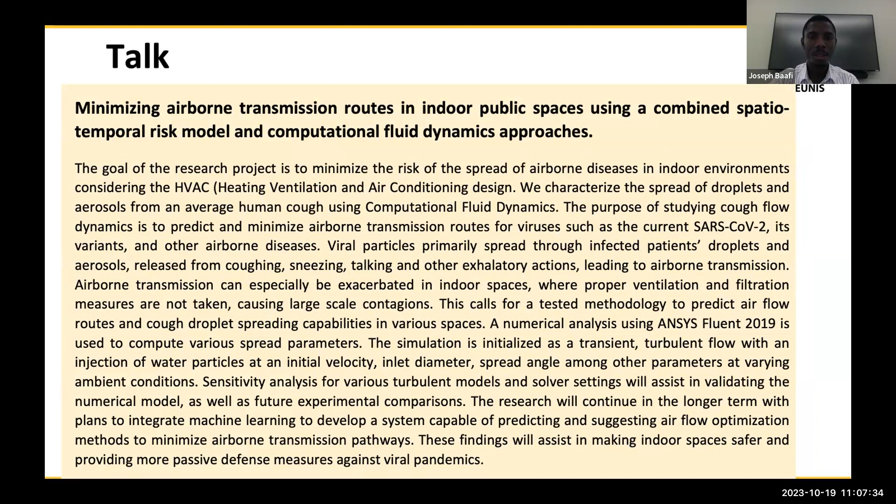And so today we are privileged to have Marina to lead us through this talk: minimizing airborne transmission routes in indoor public spaces using a combined spatio-temporal risk model and computational fluid dynamics approaches. And so we welcome Marina, and thank you all for joining us today.

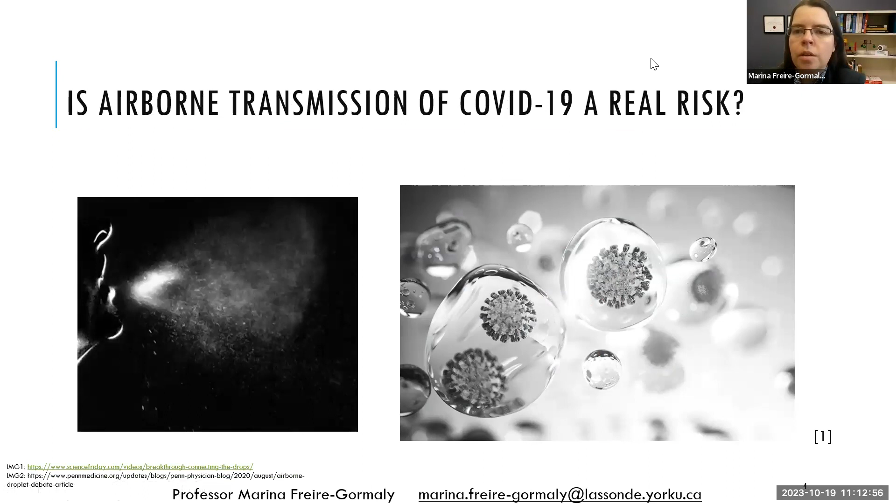So I think everyone's quite familiar in this audience with the research context, but we all lived through the pandemic of COVID-19, and we know that it's airborne transmissible. But at the beginning of the pandemic, it was a bit of a question whether the airborne transmission of COVID-19 was a real risk or not. So many researchers did these types of visualizations of a cough, or if someone sneezes, how many droplets and what are the size and range of sizes of those droplets, and how many viruses can even survive within those droplets and for how long. So there was some mounting evidence that really showed that the airborne transmission of COVID-19 was happening.

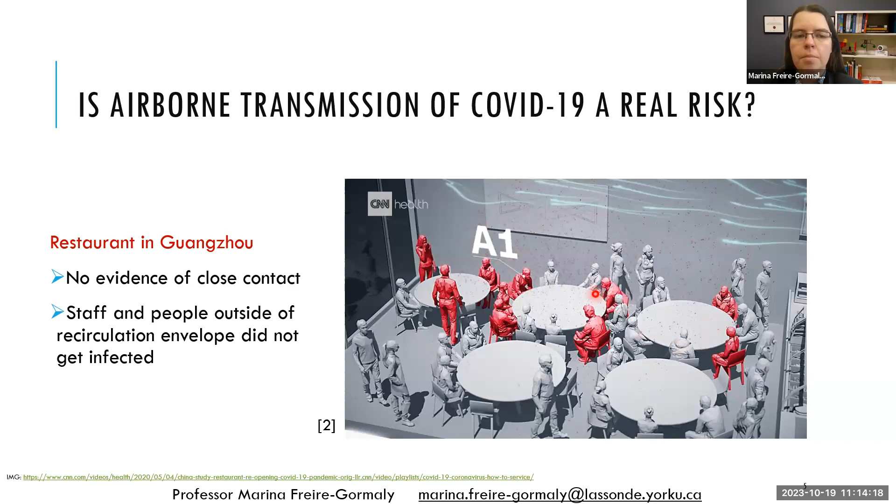So later on, some researchers did a study of the HVAC there. So HVAC is heating, ventilation, and air conditioning. And as you can imagine, it's pretty hot in Guangzhou. In the restaurant, they need to make sure the air is circulating. So they had an air conditioning system here in the top right corner. And it was creating a circulation loop right above these three tables. So that provided the evidence that all of these people in red had gotten infected because of the airborne transmission. And we also know as we speak or as we eat, we create a lot more droplets than when we're just, say, sitting passively in a lecture hall.

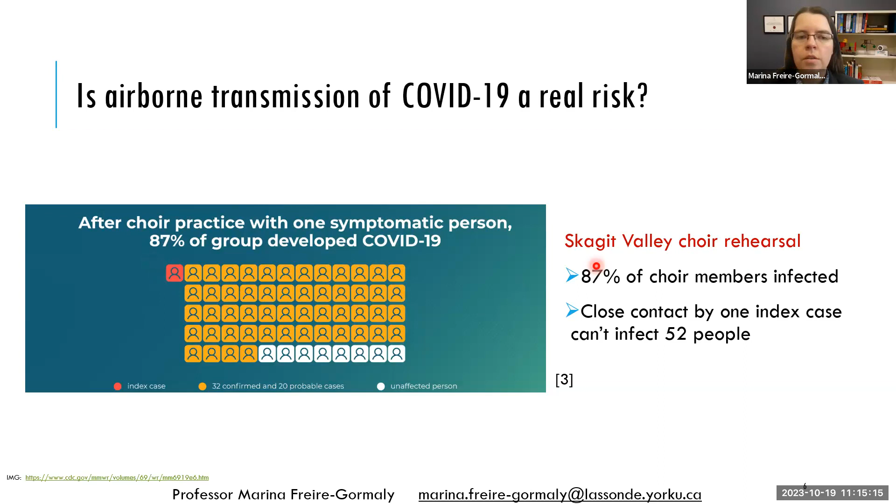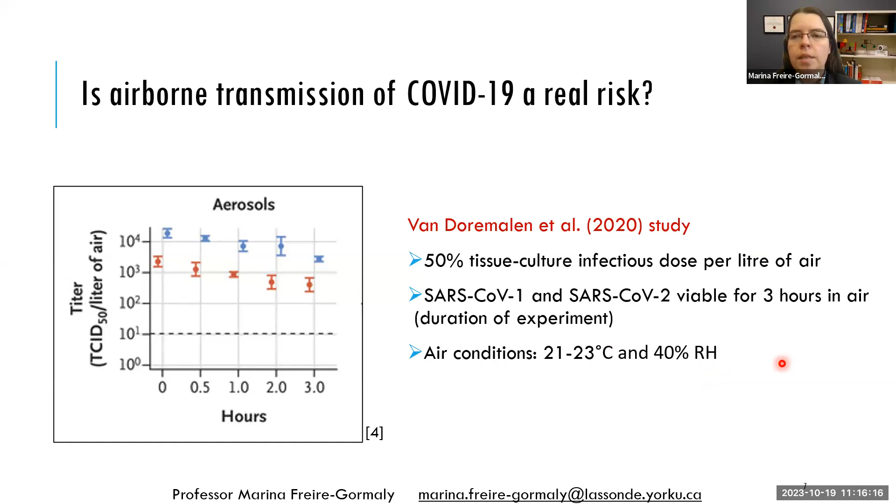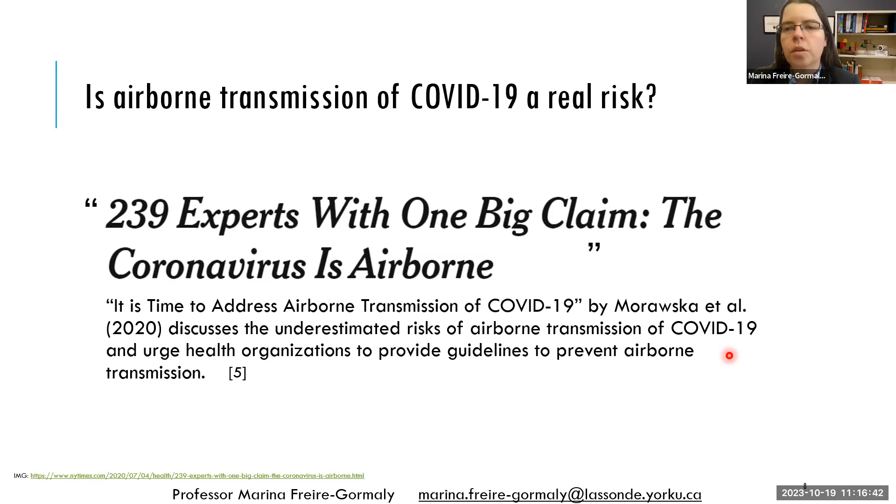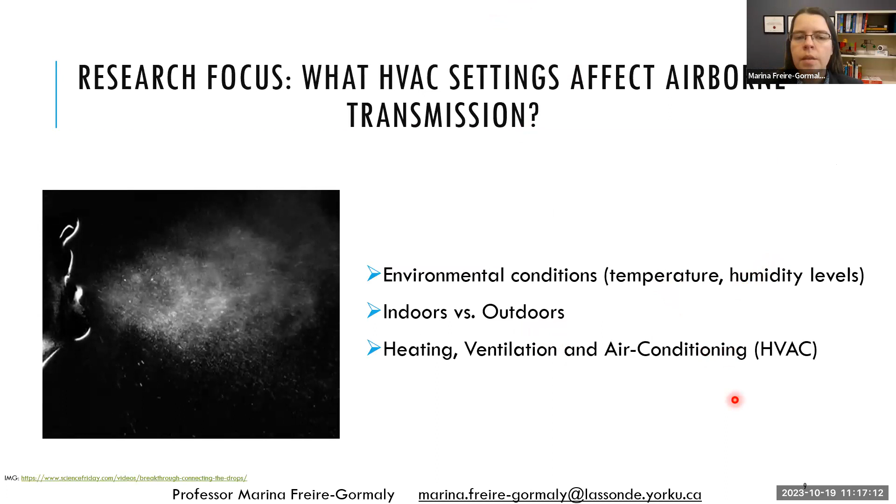So our research really looks at what HVAC settings affect airborne transmission and what are these environmental conditions like temperature, humidity levels, how about indoors versus outdoors, and then how can we design the heating, ventilation, and air conditioning, the HVAC system, in a better way to minimize the risk of transmission. And how can we even make sure that classrooms and offices are safer when they reopen?

So there was a large focus on using disinfectants and wiping surfaces, but fundamentally, people are going to be sitting there for maybe 8 hours per day, whether they're wearing a mask, a fabric mask, an N95 mask, KN95 mask, and whatever the HVAC configuration is. Still, even today, there are many researchers in the US and Canada that are really calling for improved ventilation systems in elementary schools and hospitals and office spaces.

What we've been working on, I'm going to present some of my graduate student Armakan's work, as well as Kishan Webb. He recently graduated from his master's, and Raihan Ali, he's still working on his master's, but he's made some good progress. So I'm going to show all of their recent research. So the goal of this research was to look at the space and HVAC optimization to minimize the risk of airborne transmission. So one area that's very good at this are hospitals.

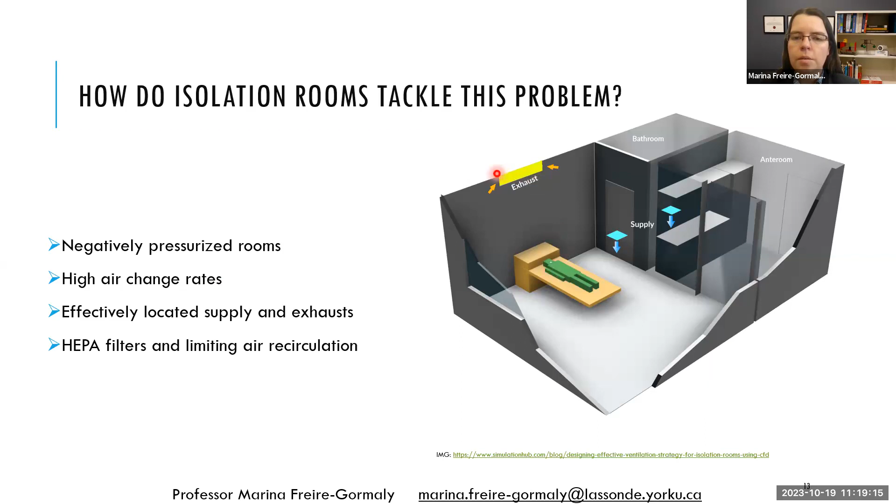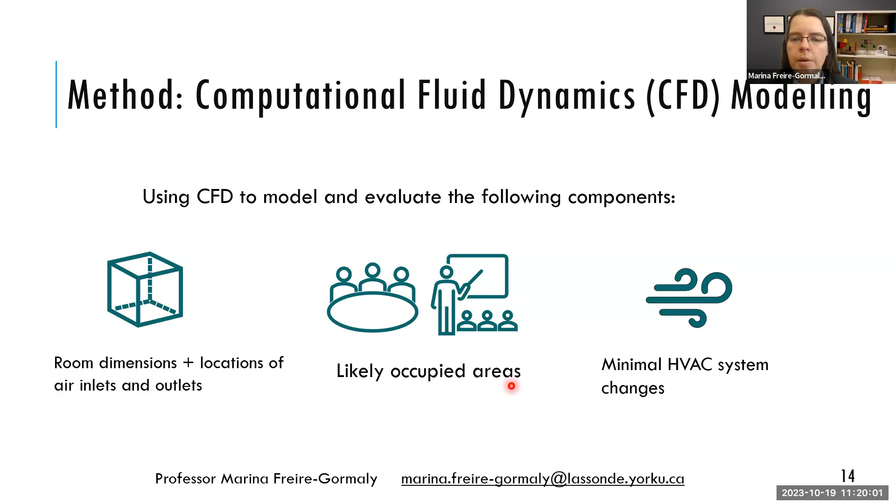So we use a combination of computational fluid dynamics modeling, and then we consider where are the likely occupied areas. And it's very expensive to completely renovate a building, so we look at minimal HVAC system changes, but we also care about how we can make it safer for the future. So it's quite important to think about how do we design buildings more safely for the future, or even aircraft or buses, for example. So we take into consideration the room dimensions, the locations of the air inlets and outlets, and then the likely occupied areas, and what HVAC system changes would need to be done.

So there was an earlier paper by Yin et al., and they looked at this isolation room. So there's a main exhaust. It's a slightly different configuration than the previous slide. And then there's an overhead supply. There's also an auxiliary exhaust and a displacement diffuser. And then this is our simulation work where we try to use their model of all the dimensions of the place and then try to simulate it using computational fluid dynamics.

They actually use an entire experimental chamber with many temperature probes and aerosol measurement devices. So they had a very extensive experimental work. So we wanted to experimentally validate our simulations with the results they had already published. So here you can see when the patient coughs, all of these aerosols are generated, and then we can track how far they've flown over the simulation time.

And this is the auxiliary exhaust. So many of them you can see are traveling towards the exhaust there. But some of them do get deposited on the floor and on this caretaker. So it's just a rectangular prism, but this represents, say, a nurse or a doctor or a care worker, or maybe even a family member that might be visiting. So we wanted to see how those particles get flowing out of the patient.

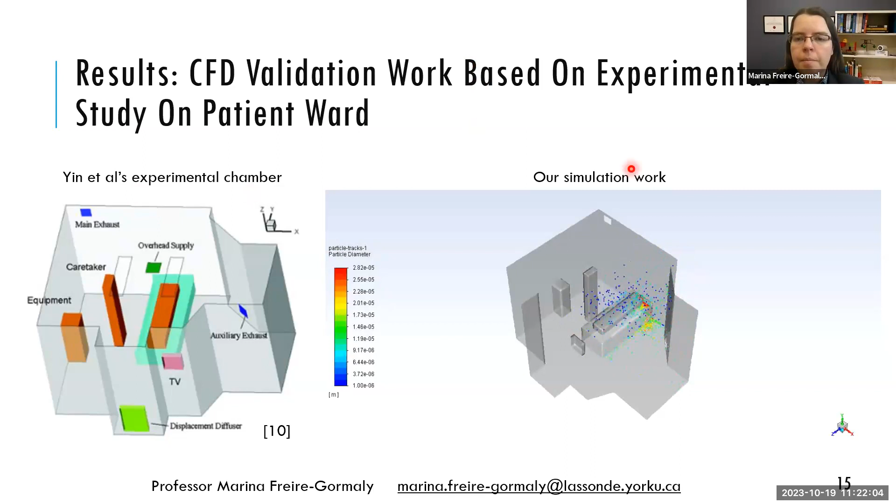So part of this work required setting up this computational domain. So it's time dependent. It also used a turbulent k-epsilon RNG model, and it also uses Eulerian-Lagrangian particle tracking. And the different initial conditions that we can specify were this particle injection from the cough of the patient. And then we also have boundary conditions like these inlets and outlets of the supply and the exhaust and the diffuser location. And then if you were to zoom in on these, you can see there's vectors demonstrating what are the directions of these velocities. Okay.

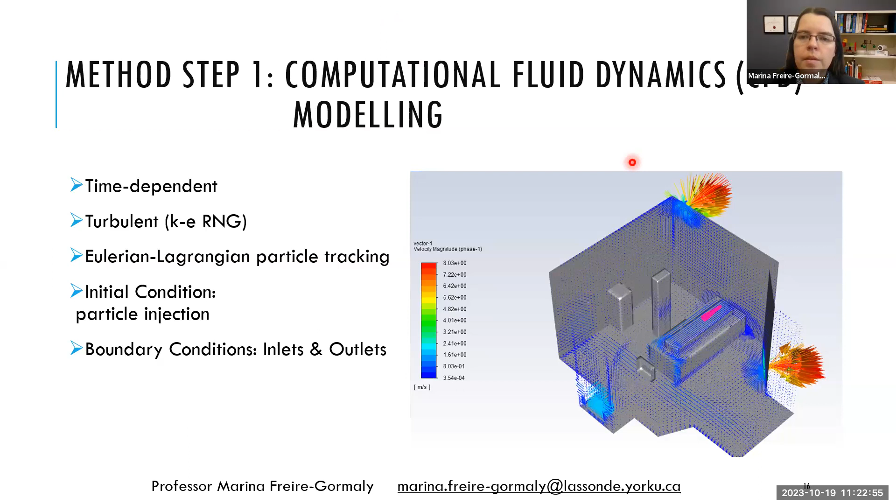So this was done for a classroom by another set of researchers, and it really inspired our work as well. So they have the instructor at the front. So when you're speaking and you're talking to a class of students, a lot of aerosols are generated as you try to project your voice and make sure that even the student at the back of the room can hear you. And so in this classroom, the researchers wanted to quantify what is the risk of transmission to these students that are in the front compared to the back, and what happens if they were to move these HVACs from the front of the room versus the back of the room.

So what they found was when it was at the back of the room, far away from the person that's talking the most, then there was a pretty well-distributed risk. But then if you take a cross-section and a plane directly where the heads of those kids are, then you can see the most risk is closest to the instructor, and there's a bit of a hot area for the front student on the far side near the window.

And also in another cross-section here, you can see that when you put the ventilation at the front, then we've made it much safer at the back, and for most of the students. Now it's only just this one student at the front. So where you put this supply air does have an impact, and earlier researchers were also able to demonstrate this. This is for a relatively small classroom though, and we know at York University, for example, or any university really, you can have upwards of 150, 300, sometimes even 1,000 students in a given classroom.

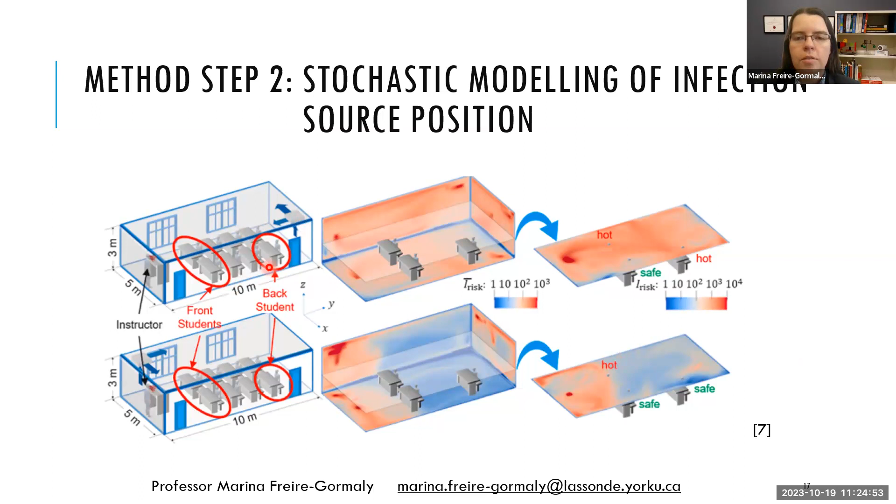So this is our model, and this is the Curtis Hall lecture hall. Some of you might have sat in it, and you can see here we have the instructor at the front of the room, and then there's a series of different air inlets and the 2 air outlets, and we have 2 different configurations. So the mixing ventilation is what is already there. You can see that there's some air inlets close to almost every row, and there's 2 air outlets.

And for displacement ventilation, this is another methodology of ventilation. It's more common in Europe and a newer design where you put the inlet air at the base of the chairs and it's closer to the ground, and then your air outlets are near the top. And some of the theories around this is that if you put the air down near the bottom, then by convection it can mix around the room.

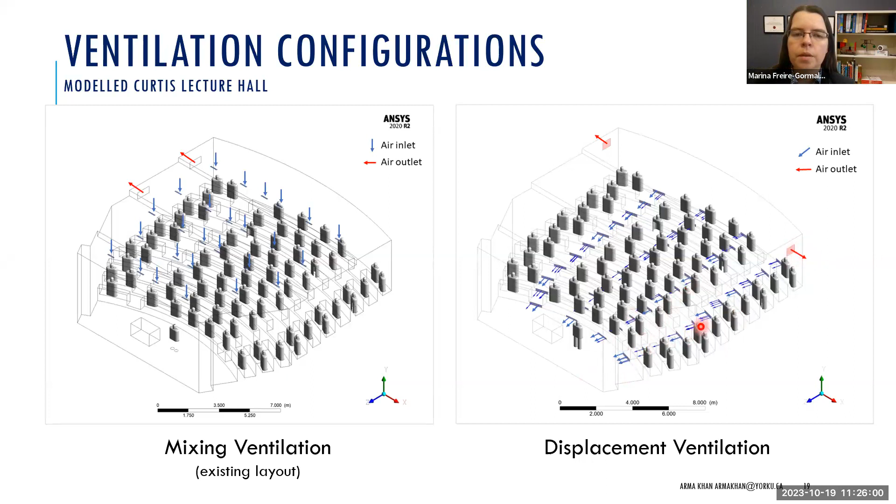So in the mixing ventilation scenario, you can see that there's a high velocity vector as the fresh air comes in. And then you end up getting a temperature contour as well for that mixing ventilation.

So we looked at putting the infection sources at different locations within the room. So let's say if we put one student at the front, maybe they have COVID and they don't know it yet because they didn't have any symptoms. Then maybe what if they're in the middle, and what if they're in the back?

So then we tried to quantify using an SIR model, and by collecting all of the amounts of aerosols at those different locations in the room over a time period of that CFD simulation. And in the mixing ventilation configuration, we found that the highest risk was near that front student because they don't get that much of ventilation if you look here, depending on where they're sitting.

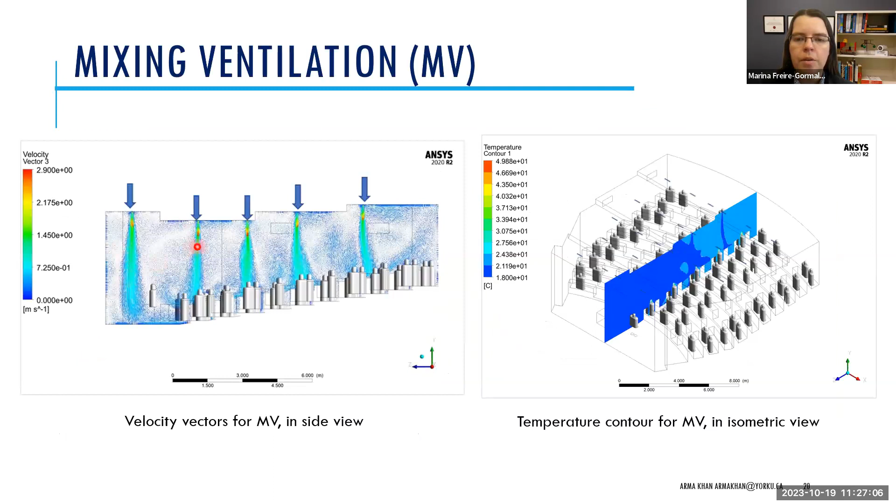So they ended up having the highest risk, but the displacement ventilation performed quite a bit worse because it seemed to spread more of the aerosols around to the adjacent people. And that was for when we looked at just a front infection source.

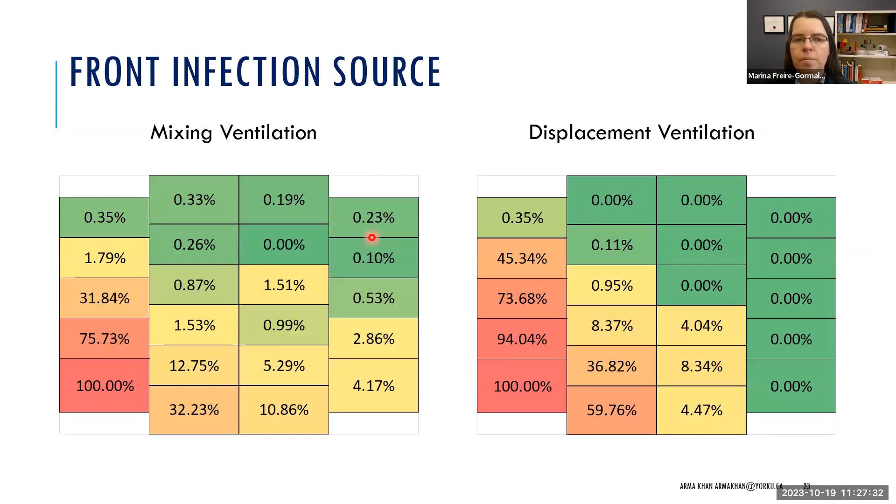So then I wanted to give you some brief results from the different projects. This one is from Kishon's thesis that he recently defended, and he looked at a much smaller domain because he wanted to explore using machine learning and how can we have this, say, an office space, although it's just a really small space, how can we predict and estimate the aerosol transmission in different locations of the room, but without running a really computationally intensive CFD model every time.

So these are some of his CFD results for the stratum. So when you look at an office room, maybe it seems pretty straightforward and it's just a small room. But then when you look into more details, and this happens a lot in your graduate studies, it might seem very simple on the surface, but then as you dig into it, it gets a bit more complicated. So the person has a certain heat profile.

They're actually generating heat. As you know, your body temperature is around like 36.5, and you're constantly emitting that heat into the room. And then your computer also is providing heat into the room. So all of these things actually influence the airflow patterns. And then there's different inlets and outlets on the office. And even when you think about the entrance of an office, there's a door slip. So depending on whether the office door is open or closed, you're going to have a different airflow into and out of the room.

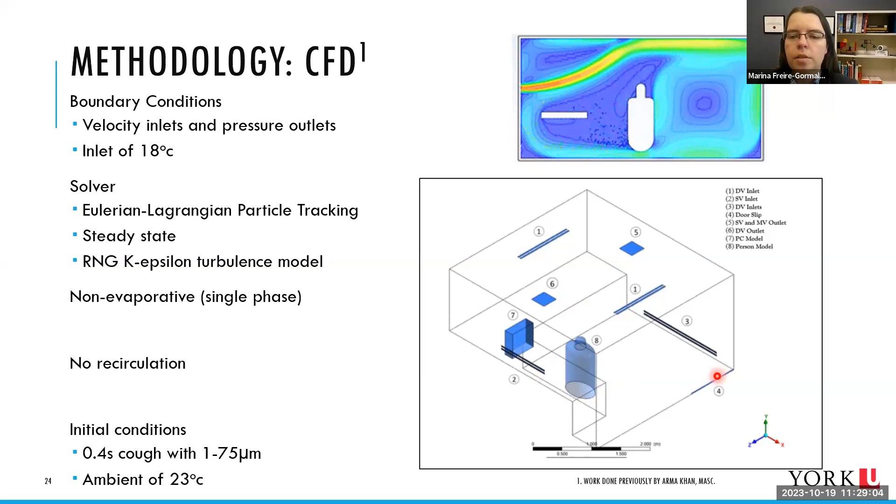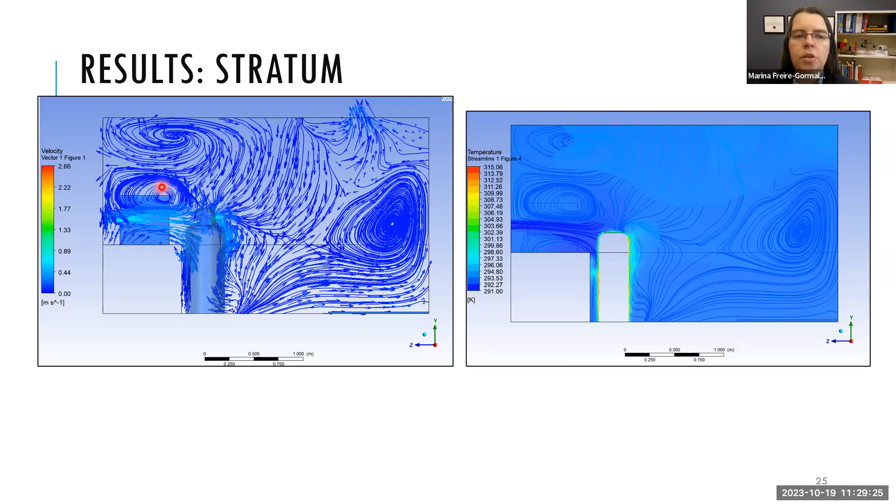So here you can see some of the recirculation patterns that occur within that small office space. And even as a grad student, you probably meet your prof maybe once a week or every 2 weeks. So you might be having a pretty one-to-one conversation in this pretty small space. So these are pretty useful to see. And then you can see when the person coughs in the office, how long the concentration kind of stays around in the room and how long it takes to exit.

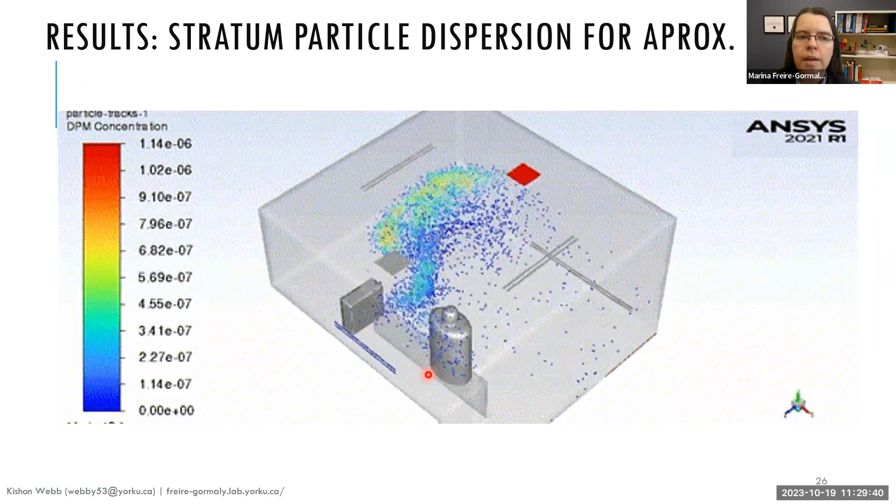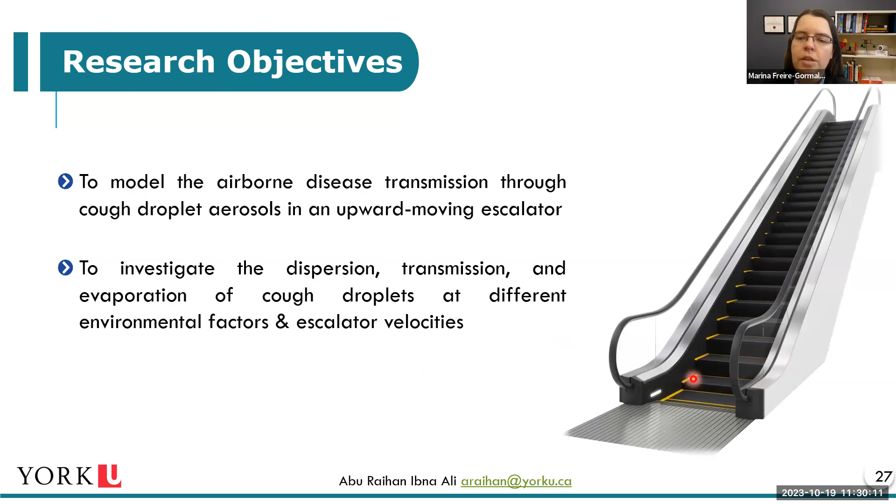So then one of the projects that Raihan is working on is trying to model the airborne disease transmission through cough droplet aerosols in an upward moving escalator. So he wanted to look at the dispersion and transmission and evaporation of the cough droplets at different environmental factors and escalator velocities. So you've probably gone to a mall, or even if you need to use the TTC or the public transit, you need to use the escalator all the time. And some offices even have them.

So when there's an upward moving escalator, you can think about what is the effect of the escalator velocity or the effect of the relative humidity. So if it's inside a building, or depending on where that building is, the relative humidity could be different, and also what the environmental conditions are. And then all of these can impact the dispersion of those aerosols, the deposition of them, so whether they land on the handrail or on the stairs, or maybe on the person behind them.

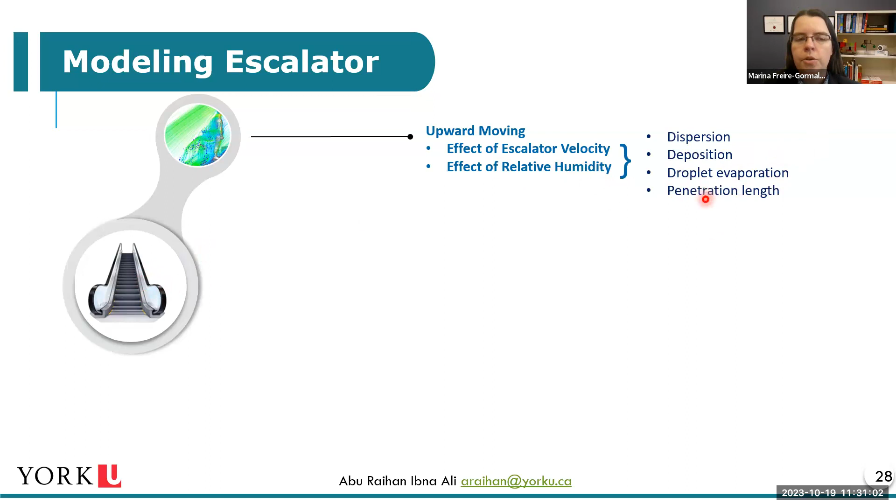And then the droplet evaporation rate is also impacted by the relative humidity and the temperature, as well as the penetration length, so how far down the escalator does it go. Now for the downward moving escalator, he investigated these same velocity and relative humidity and how it impacted those. And then he created a response surface using optimization to figure out what's the best velocity.

And he also used this genetic algorithm, which is an optimization tool to find out the best design in a really heuristic problem where you have many inputs and outputs, so you don't necessarily have a fixed linear or a continuous problem.

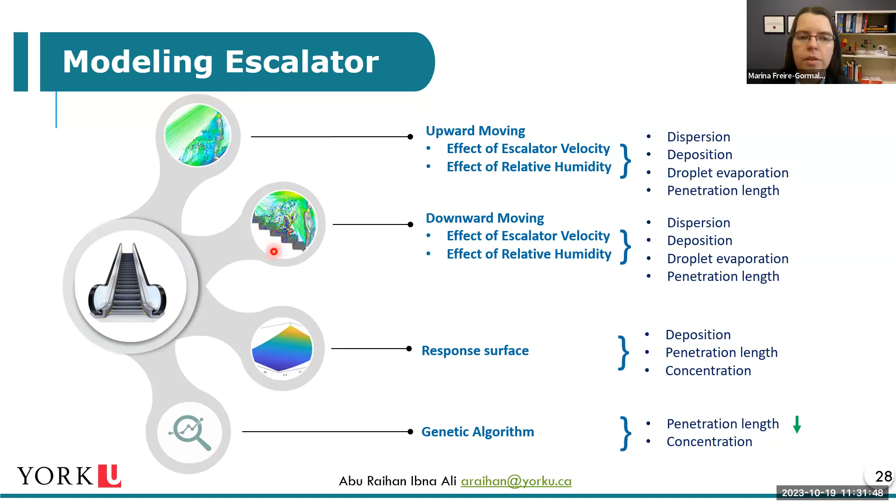And he was looking at how to decrease the penetration length, so how far down the escalator or how far back up it goes, and decreasing the concentration. So those were the goals.

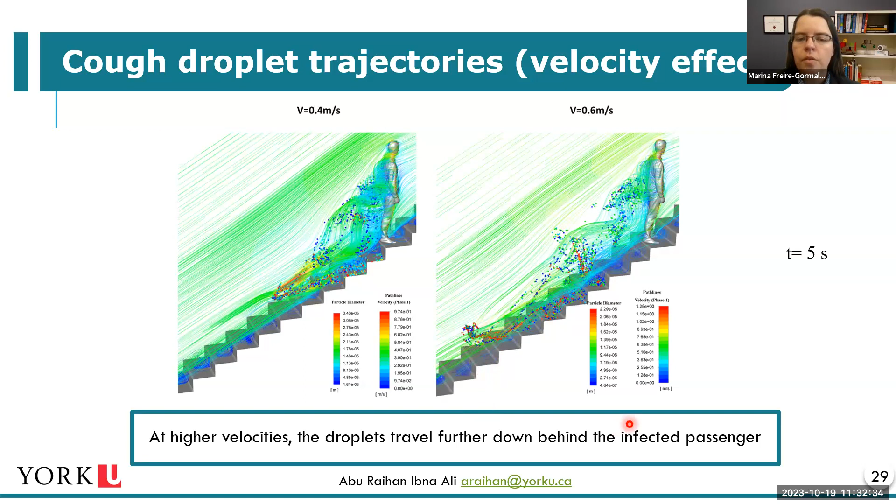And here, for the effect of velocity, this was for the cough droplet trajectories. And you can see that as the escalator is going upwards at a velocity of 0.4 meters per second, it travels down to around this step. But when it's going at a faster rate of 0.6 meters per second, you can see that the aerosols bounce down the stairs much farther. So this was after 5 seconds of simulations. So at higher velocities, the droplets are able to travel further down behind that infected passenger.

We've also been really fortunate to collaborate with a lot of industry collaborators. So de Havilland Aircraft of Canada Limited, and this is actually a really exciting organization there. That's the Downsview Aerospace Innovation and Research Hub. It's located in Toronto, and it tries to bring together suppliers as well as aircraft companies and researchers and students all together to really come up with new innovative solutions to really push the industry forward. Y-Space YorkU is an organization which helps to commercialize technology that's developed in York, and then two smaller companies, Hummingbird Health and TMBN Extrados.

And I guess I would just emphasize here, for your career as a graduate student, all your classmates and colleagues, as a grad student you actually have a lot of leeway to initiate new things like seminars, or maybe you want to lead a club that doesn't exist yet, like maybe a chapter of one of the mathematical societies, or maybe the American Society of Mechanical Engineers or Canadian Society for Mechanical Engineering. You can initiate all these types of chapters as a grad student, and then that can help you develop your network. And then later on in your career, your classmates, maybe some of them will start their own company, and then you can try to work with them later on in your life, and also keep in touch, obviously. So I would just encourage everyone to be really collaborative and friendly with everyone that you're working with.

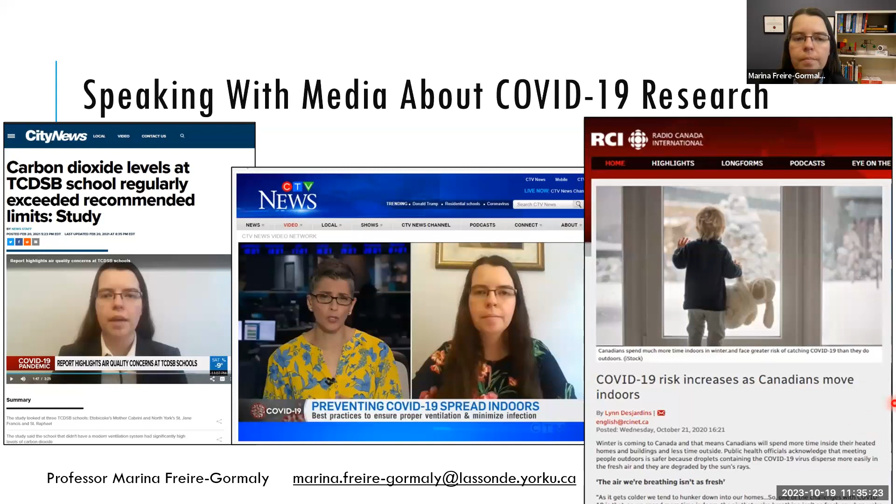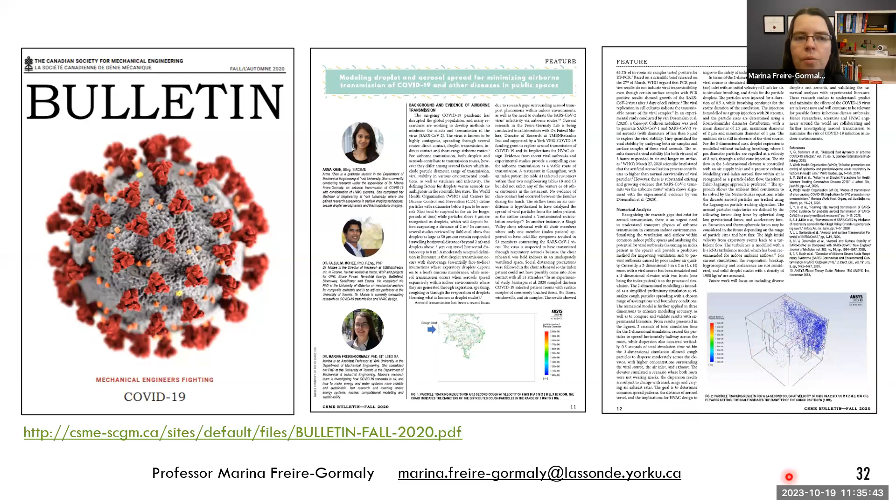We've also been grateful for a lot of funding from NSERC through the Missions Alliance grant. This is the collaborative project with DAIR and de Havilland, and we're still working on this one to be able to really understand how aerosol transmission happens even in aircraft. And then we're also working under the Emerging Infectious Disease Modeling Network. So we've been grateful for some funding from the OMNI network to be able to do this research, and also to have a platform to share our work with fellow mathematicians, and a really wide range. I've learned a lot by being a part of this community of researchers in emerging infectious diseases. So I'm really grateful to be a part of this network.